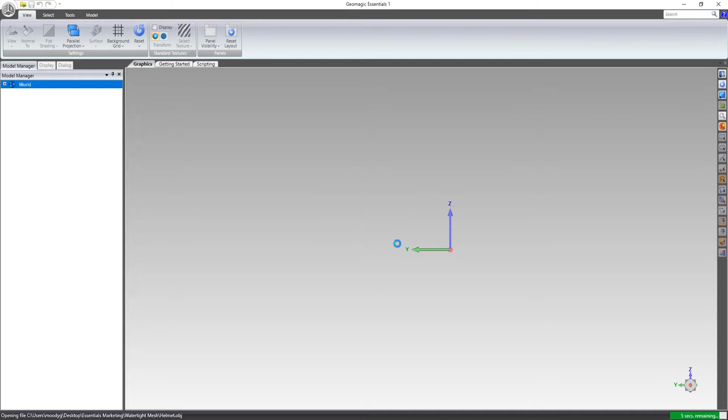The software then displays a unit pop-up asking me to specify the units for the data. In this case, we'll leave it on millimeters because that's the units that I scanned in. Then I'll select OK. The next pop-up that is displayed is the Mesh Doctor pop-up. It asks me if I want to run the Mesh Doctor tool right away. I'll select No this time because first I want to turn off the texture.

To turn off the texture on the mesh, go to the Display tab next to the Model Manager tab on the top left-hand side of your screen. Scroll down to the Texture checkbox and uncheck it. The model then will turn blue, which is the standard color for mesh models inside Geomagic Essentials.

Next, I'll run the Mesh Doctor tool. In the Scan Tools ribbon, in the Repair group, select the Mesh Doctor tool. This tool will automatically run and identify errors in the model in the dialog box. It will also display errors on the model in red. Select Apply to run the command. This may have to be run a couple times. Once there are no errors, select OK to exit the command.

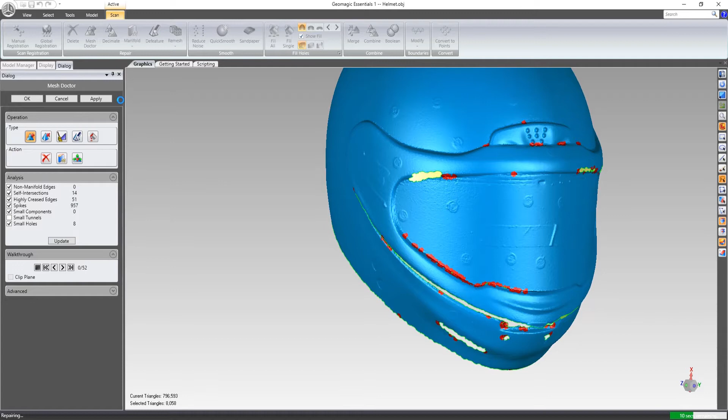Next, I'll want to fill holes. We will be doing this in several ways. First, I want to make the bottom as flat as possible. To do this, I need to put down some reference geometry. I'll start by best fitting a circle to the bottom boundary. In the Model tool ribbon, I'll select the Circle dropdown and then select the Best Fit Boundary option. I'll then highlight the boundary. The software will automatically best fit a circle to that boundary.

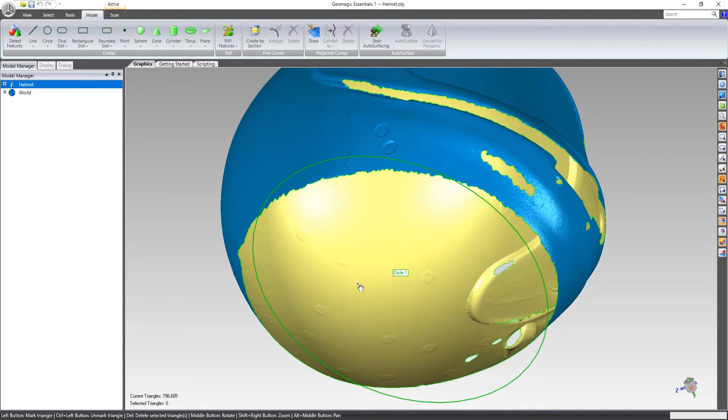Then I'll use the circle to place a plane. Again, in the Model tool ribbon, I'll select the Plane dropdown. Then I'll select the Perpendicular to Axis option. In the dialog box, I'll set the axis as Circle 1, and then I'll set a point as close as possible to the bottom of the mesh. This will put down a plane that I can then use to roughly square my part.

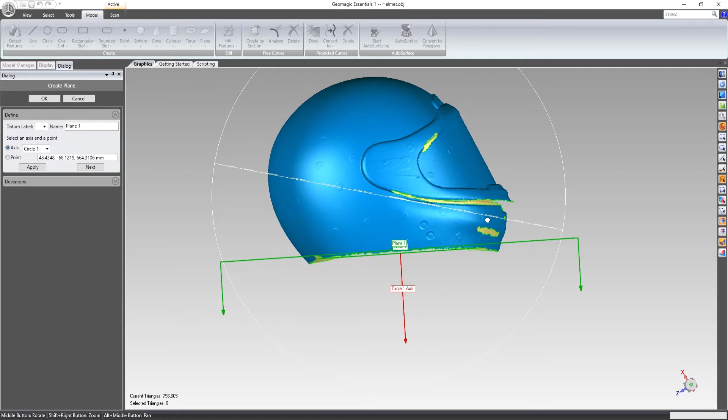To roughly square my part, I'll first orient the model so that the plane is parallel to my view. Then, to correct the angle, I will left-click and drag on the outside of the viewing window to make the plane straight. To verify the plane is roughly straight, I'll move the model down towards the bottom of the viewing window and line it up with the border of the viewing window.

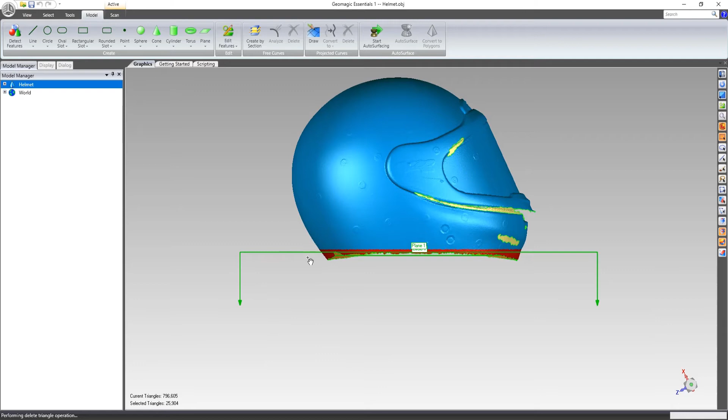Once the mesh is roughly aligned to my view, I'll use the Box Selection tool to trim the model. On the right-hand side toolbar, select the Box Selection button. Towards the bottom of the right-hand side toolbar, select the Through All tool. This will allow the selection to go all the way through the model. Next, I'll make a selection on the bottom of the model, then delete it to make the bottom of the boundary roughly straight. If I zoom in, I can see the boundary is still jagged.

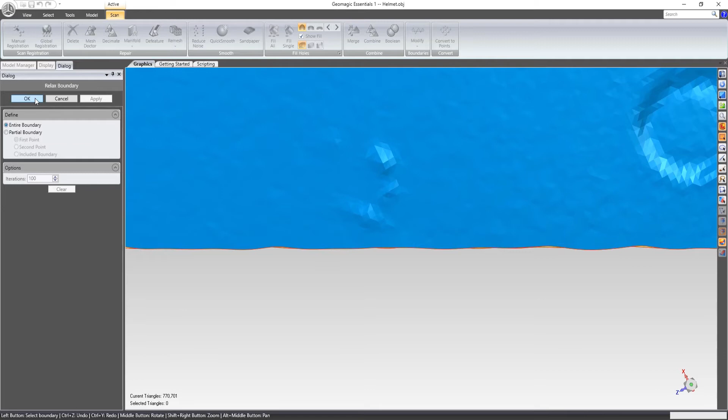We can compensate for this by using the Modify Relax Boundary tool in the Scan Tools ribbon. In the Modify Relax Boundary dialog box, I'll set the iteration to 100. This will smooth the bottom boundary, which will give me a better mesh surface. Now I'm ready to fill the holes with the Fill Single tool in the Scan Tools ribbon. In addition, I'll also change the fill method to Flat.

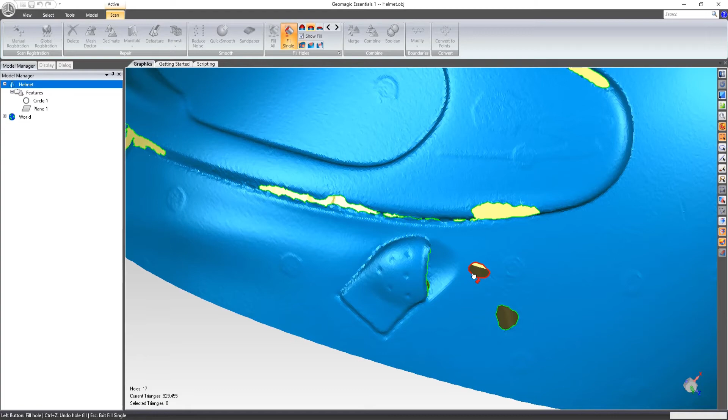Once the large hole is filled on the bottom of the helmet, I can then start filling in the other holes individually. Again, I'll select the Fill Single tool in the Scan Tools ribbon. Then, after locating the next hole to fill, I'll change the fill method to the middle option, Tangent. Without leaving the Fill Single tool, I'll navigate to the next hole to be filled and fill it, changing the method if needed. I do not need to leave the Fill Single tool as long as I'm filling individual holes.

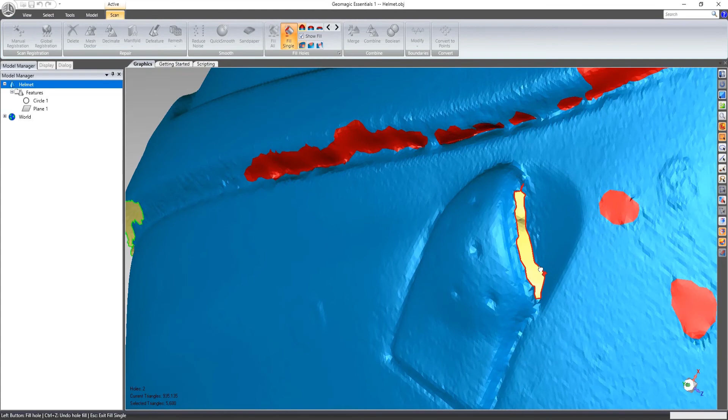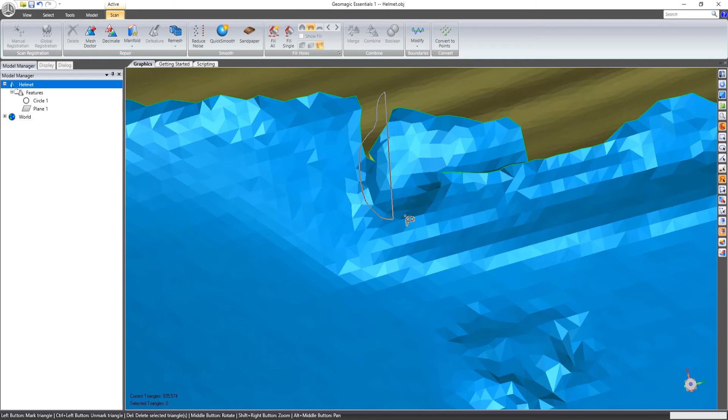Finally, the last hole is too large to fill all at once, so I need to remove some polygons to split the hole up into sections. To do this, I'll unselect the Select Backface Mode tool in the right-hand side toolbar. I'll also change my selection mode to the Lasso Selection tool. Then I'll select the area to be deleted. Deleting has caused some triangles to be free-floating. I'll deal with them in a bit.

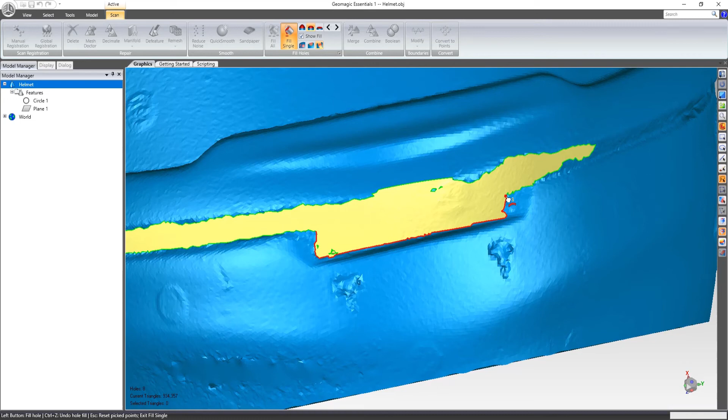Now I want to fill the bottom portion of the hole. To do this, I'll change the fill type to Bridge. This option can be found in the Scan Tools ribbon in the Fill Single tool below the Fill Methods options. Then I'll select a point on one side, left click and drag to the opposite side. Additionally, if I want to create a point-to-point bridge, simply click on one point and then click on the point on the opposite side. Once the separation and bridging is complete, I can now fill the holes using the Complete fill type and the Curvature fill method.

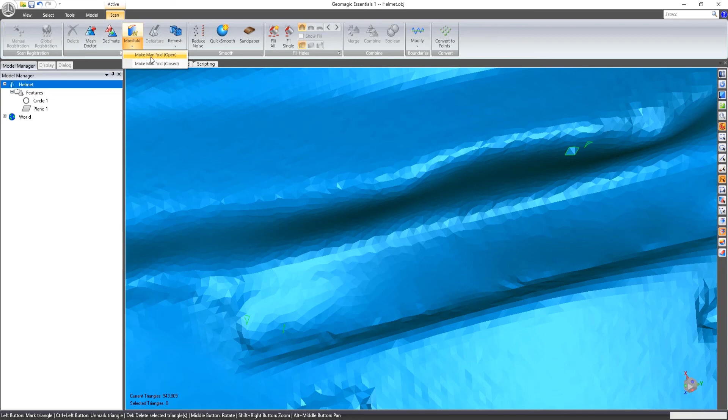Lastly, I need to remove any free-floating polygons from our model. To do this, select the Manifold dropdown in the Scan Tools ribbon. Then select the Make Manifold Open tool. The software will automatically remove any polygons that are not closed volumes. We now have a watertight polygon mesh. Today we talked about how to create a watertight mesh model using various tools in Geomagic Essentials.